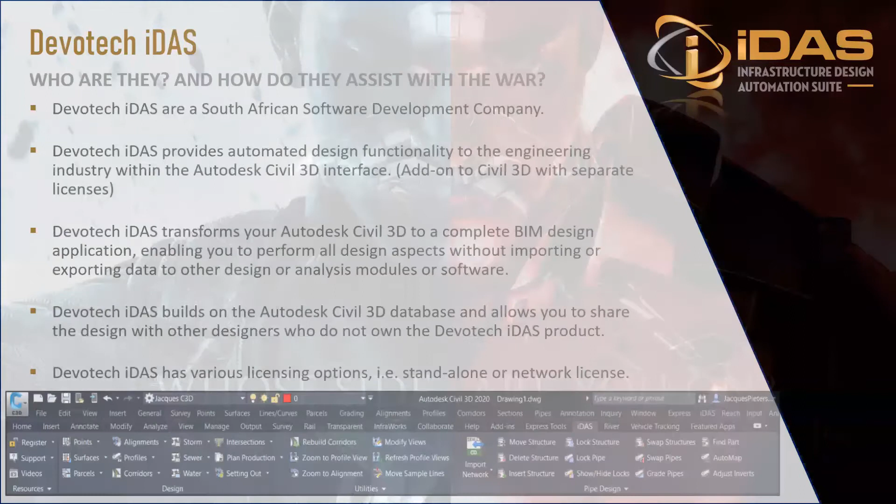So moving on, for those who don't know what Devotech really is, I'll quickly explain. Who is Devotech iDAS, and how are they going to assist us in this little Civil War reenactment I have prepared? Devotech is a South African software development company. They provide automated design functionalities to engineers in the industry within Autodesk Civil 3D interface. In small brackets, it's actually an add-on to Civil 3D with its own separate licenses. Devotech iDAS transforms your Autodesk Civil 3D into a complete BIM design application, and it enables you to perform all design aspects without importing or exporting to other design or analysis modules or software. So everything is basically done inside Civil 3D, there's no more import or export of data at all. They are built upon Autodesk Civil 3D, so Devotech can't actually work without Civil 3D because it's built in, and that's the key function.

There are various license options that we provide, for standalone and network licenses. I also added at the bottom a small tip of how it looks like in Civil 3D. As you can see at the bottom, there's this little iDAS icon, which is the actual add-on with its amazing functionalities.

For the main part, the Civil War, we're going to discuss today how road designs are designed and modeled throughout. So a quick overview: the first segment will show how Civil 3D alone, the traditional way, constructs roads and intersections currently. Then we'll move on to how Civil 3D and Devotech iDAS does the automated way of designing roads and intersections. Finally, we'll compare the results and statistics of who is actually winning this battle, because this is a two-part system, we're going to go into depth seeing who's the winner at the end.

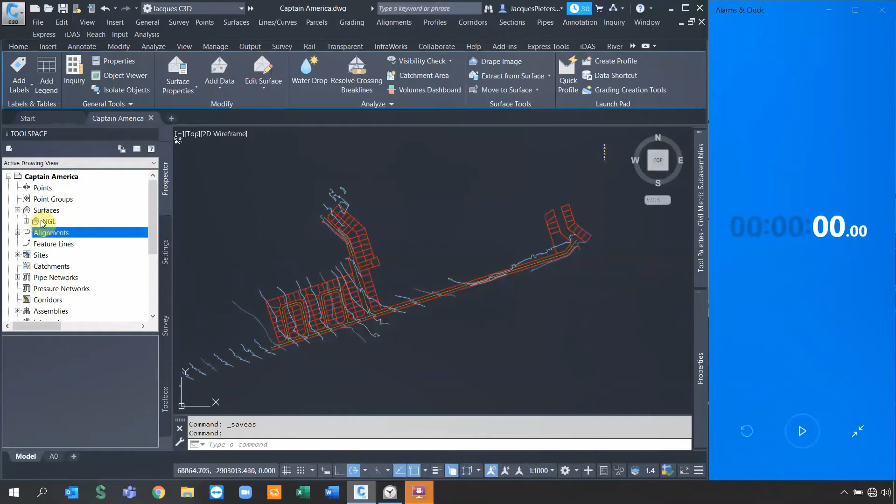If I jump to Civil 3D, we can start off. Just to indicate one more time, there's an already existing surface called NGL, as well as outlines for the polyline. We're going to design these 2 roads, and there are additional 4 roads which you can also go and design a bit later on.

Now, like I mentioned, the assemblies have already been created—for the roads, as well as for the intersection design and the bowmouth design. So all of these are already set up and ready to go. My main objective is to design these 2 roads and the intersection.

What we're going to do is I'm going to time myself and quickly do all of these steps. I'm not going to mention each and every step I'm doing, but I'll call this Captain America because this is his drawing file. I'm going to go into a bit of technical detail right now, but you'll find the benefit as soon as I go. So without delay, let's start this thing.

Quickly, if I want to create any type of alignment from an existing object, I can say alignment from an object. If I go select, it's going to ask me which direction I want, and it indicates the direction. I can give this a proper name, specify the site, as well as defining the label set. I'm going to change this to major above center line.

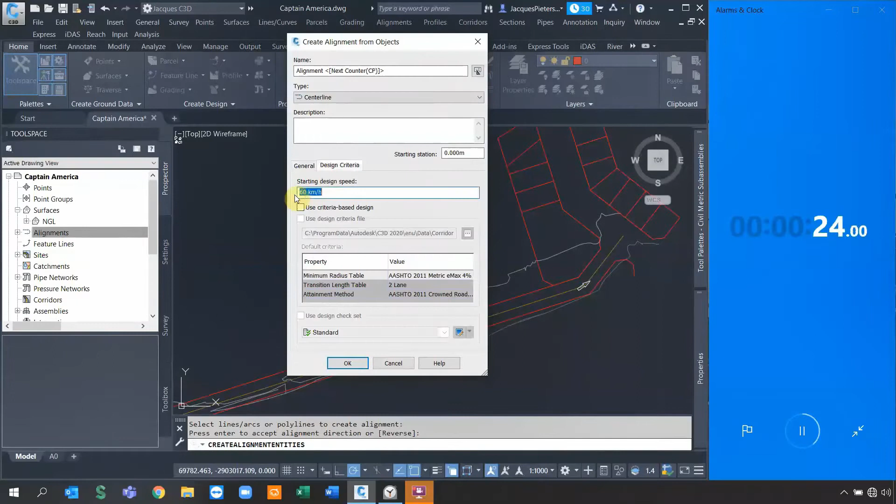The design criteria, because all of our roads are according to standard, needs to be designed according to SANRAL—I'm going to use that as an example. And I'm going to say use design check sets. So I simply say OK, and transform the polyline to an actual alignment.

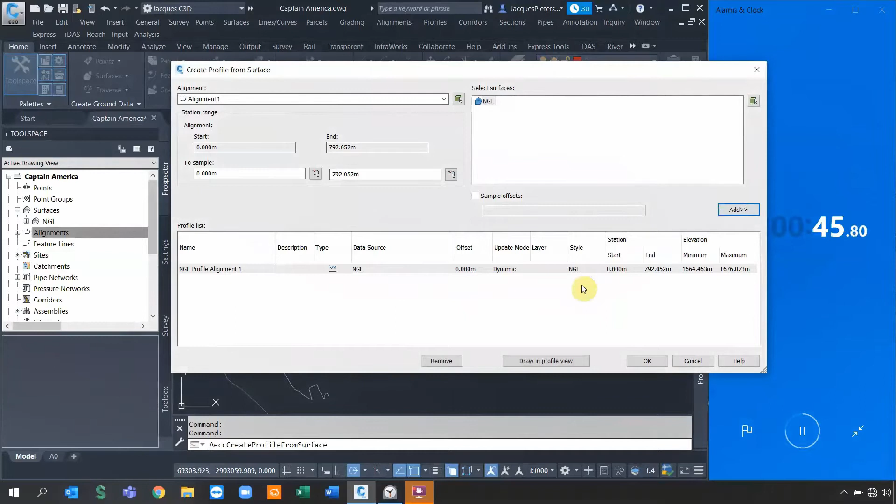Now the critical next part of the design is the profile design. If I go to create profile from surface and add it to my system, I can simply say draw in profile view. For those who don't know, profile is a fancy word for vertical alignment in Civil 3D.

So I need to set up my bands and my station range to set up my long section, or in this case, as we call it, a profile view. I set up the bands and say create profile view. As soon as I do that, I can place the profile view somewhere here in the space. And now I'm ready to do the next design.

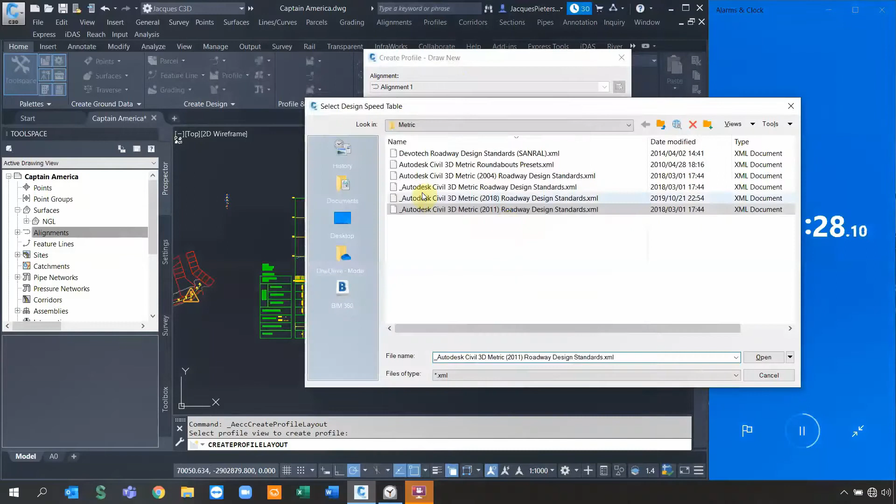The next design is the profile design itself. As a civil engineer, I just set up one setting—I don't want labels on these things—as well as its design criteria, which is normally our K values that we need to specify in a long section. So I can say use design check, and there we go.

So I can just quickly model up and design this road. Just for time-consuming purposes, I'm not going to design it 100%, but I'm going to design it very closely to accurate. Let's say, for example, I'm going to place it somewhere over here and just snap to the end.

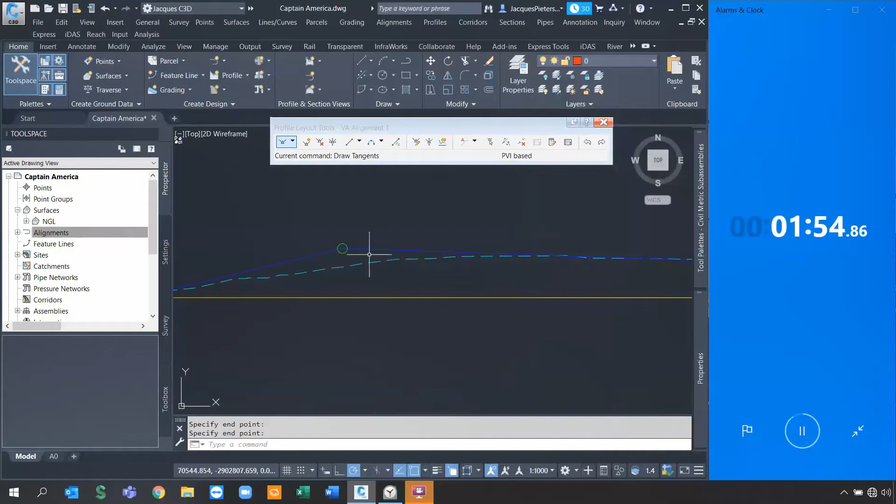There we go. Then what you can do is add free vertical curves. I like to use this free vertical parabolic PVI base because it allows you to give a few settings. We'll specify the radius as 100, and there we go. As soon as I do that, that's now sufficient enough. You can still add more PVIs if you want to, but like I said, this is a time constraint—I'm trying to get as much as possibly done to design 2 roads and the intersection.

As soon as I do that—very critical—I need to design my super elevation because I do have bends around it. So I can go and specify, create super elevation now, and specify what type of system.

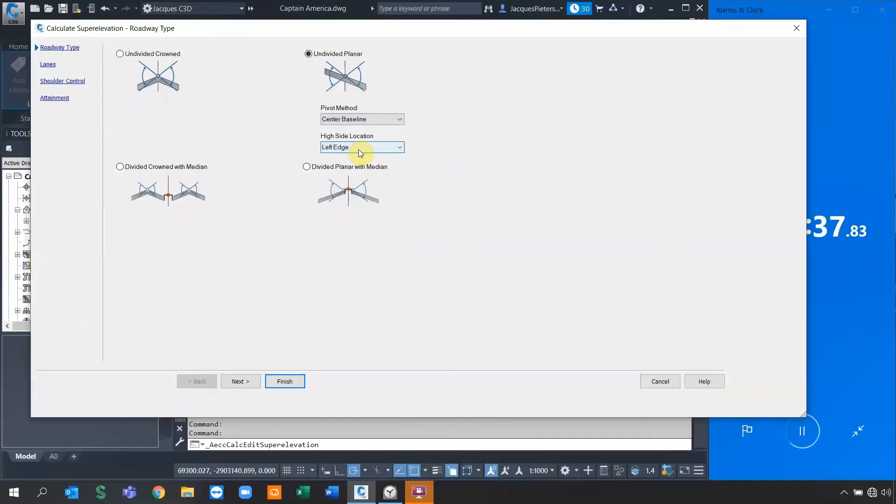Now I want an undivided planar, as well as which side is my high side. Left edge will be fine. And then I can go and say next and specify the normal lane width. So in this case, I'm going to specify the width as 3.7.

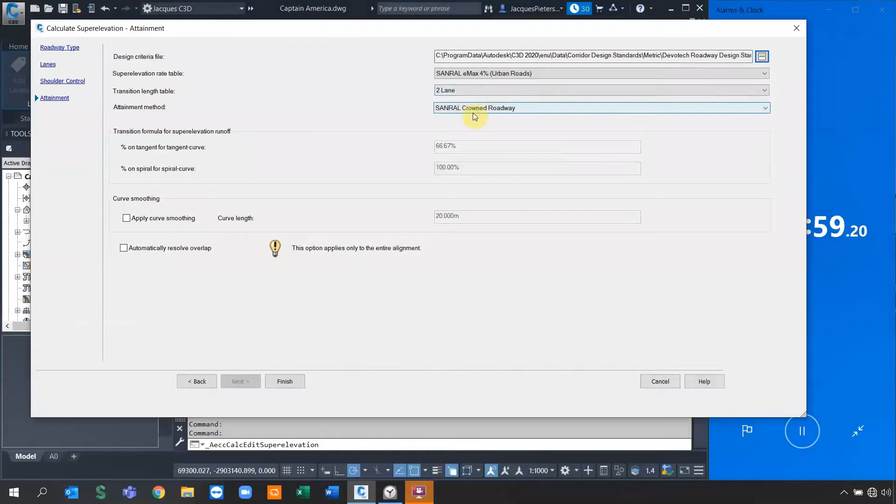The outside edge shoulders, I can go and specify, as well as we have design criteria for the super elevation design as well. I'm just confirming I'm using Devotech's SANRAL standard. So as soon as I do that, I can say automatically resolve overlaps if there's overlaps in my super elevation. And there, ladies and gentlemen, it's done.

So we've designed the alignment, the profile, and the super elevation. Now the next step is I need to basically go and combine everything else. You can also see in the long section, it actually adds that super elevation details. So the critical stage now is I need to go and put this together.

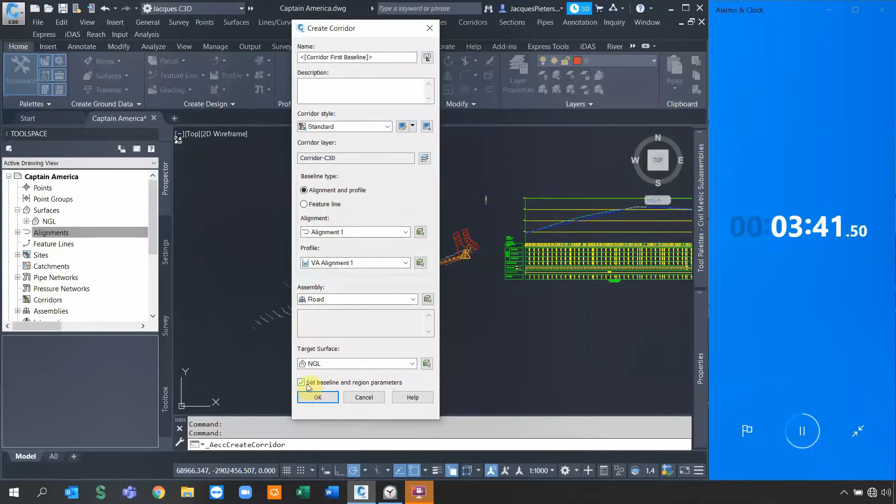So that's what we call create a corridor. If I go to my tab, corridor, I can go and create a specific corridor and specify the profile design. My assembly, I'm going to use as road, and my target surface needs to be NGL. Then I can say set baseline and region parameters, and there we go.

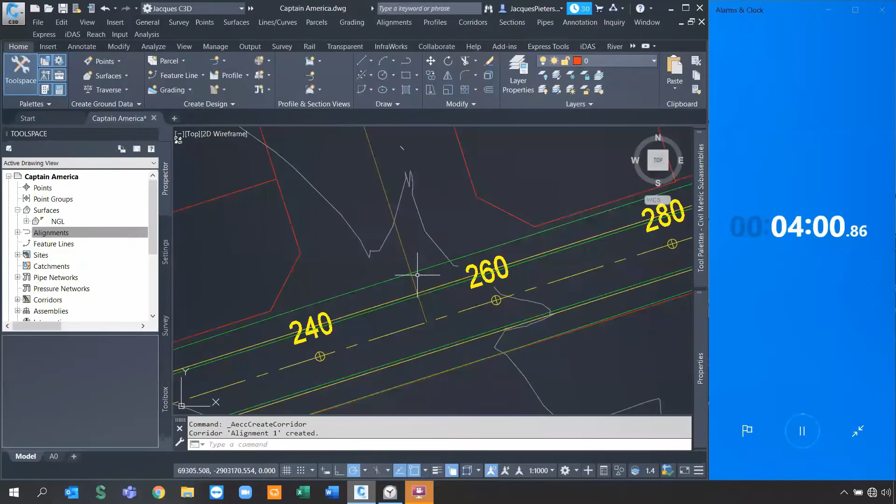So that's creating just one road on its own, but there are some few elements missing inside of my long section. As you can see, the values and the levels are not correct because I need to extract that data. The data I acquire is called ETWs. It stands for edge of travel way. It will pick up the levels on each side of the road.

Now, in Civil 3D, the old-fashioned way, we need to do this by hand. So I am literally going to say create profile from a corridor, and I'm going to call this road 1 ETW to the left. The style is to the left. And I need to do exactly the same thing for the right-hand side.

So as soon as I do that, I can simply go and create it. And I can say road 1 ETW to the right. And I can just change the style to ETW to the right and simply say OK.

So as soon as I do that, it creates the two additional profiles. And as you can see in my long section, they have appeared.

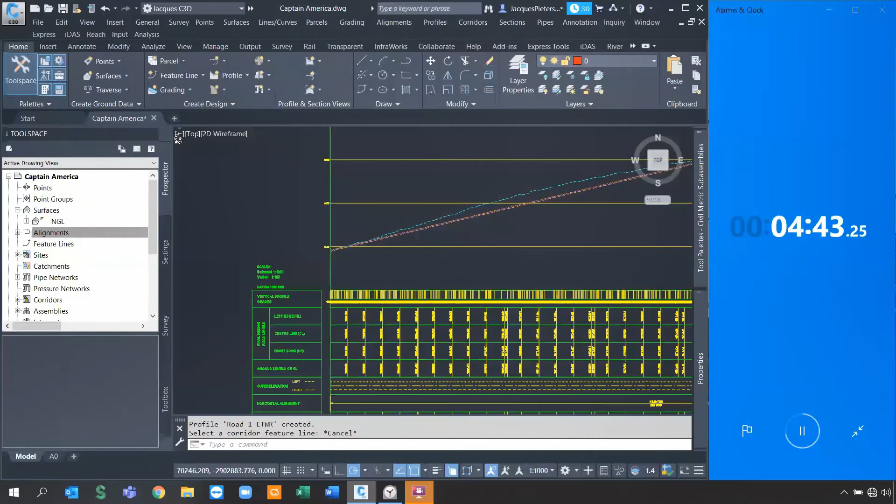Now, one thing I need to set up manually in the old-fashioned way is I need to go to my profile view settings so I can correspond the correct data inside of my bands, or in our case, on our vertical long section. So this is a bit of a tedious process that we need to do manually.

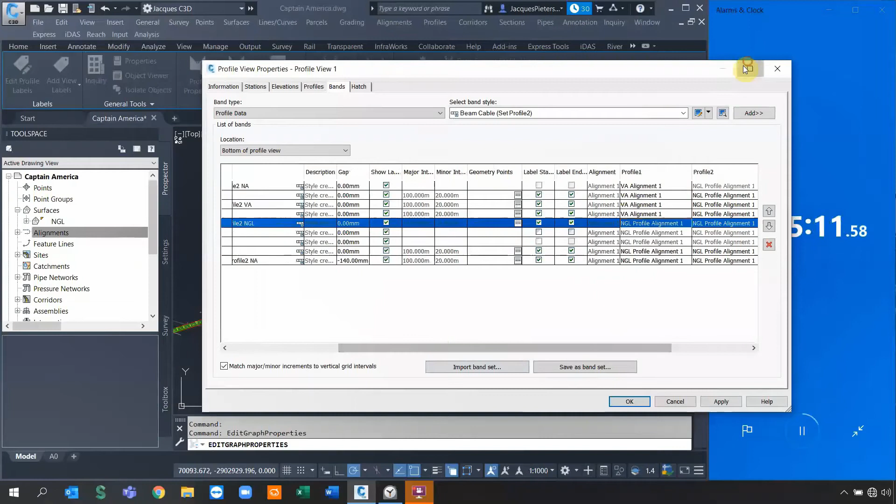So what Devotech iDAS actually have done, they've made it very nice with their styles. And if you're even a beginner, it's very easy to follow. So in the styles, in the beginning styles, it tells you which profile goes where. So I'm just going to change quickly these things.

That needs to be VA. This needs to be road ETW to the left. VA, ETW to the right. Yet again, VA. Oh, sorry, that needs to be NGL. Yes, that's correct. And I can simply say apply and OK.

So there we have created all of the correct data inside of the long section. And now it corresponds to my perfect design. Then something to mention, what we do require a bit later on is, as you can see, the levels and the super elevation.

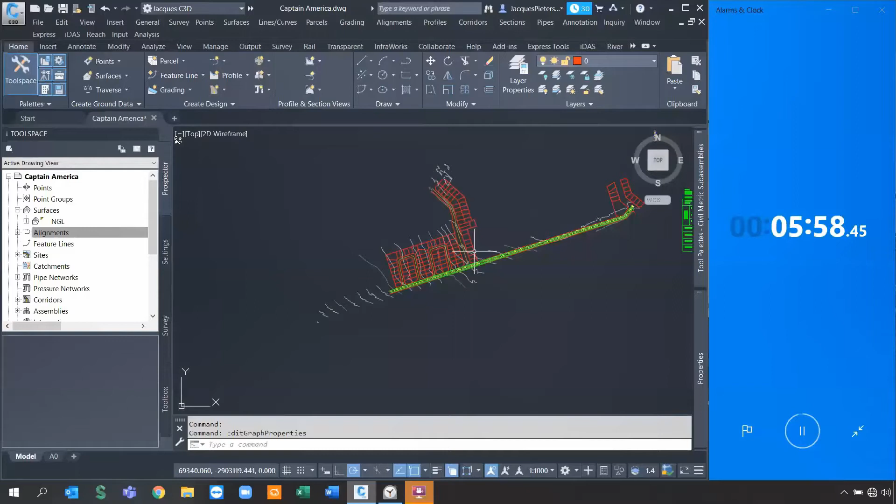So another way of displaying these levels is by creating a topo surface for my road. Now, the old-fashioned way we need to do this, we need to simply go select the corridor. And inside of the corridor, I need to go to my corridor properties and manually add these surfaces.

So if I go say add the surfaces and I rename it, I'm going to call this, let's say, road 1 top. So it picks up the specific code. I can give this thing a specific style as well. So let's make it contours colored 0.2 and 0.4 increments.

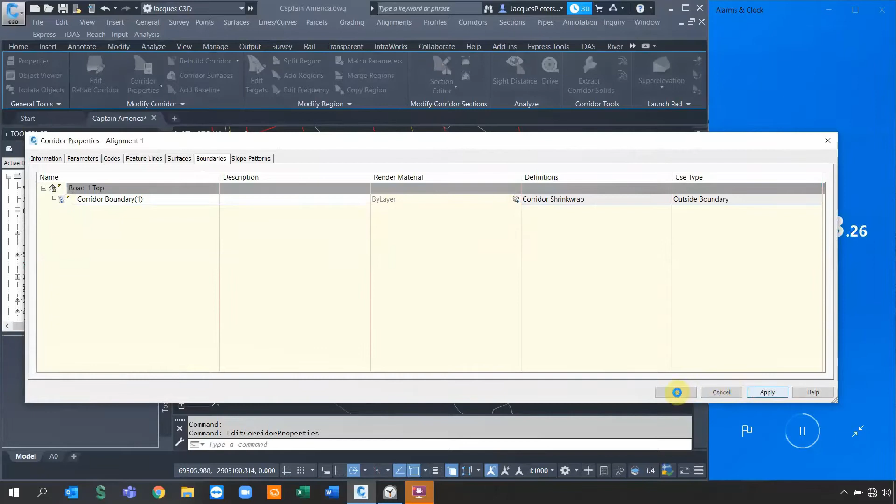And I need to go and add to specify the code and specify top links. Then for the boundaries, so that the surface does not extend outside of my boundary, I set up that detail and say apply and OK. As soon as I do that, it actually builds the entire road.

Now, in this stage, I am happy with it, but now I need to do exactly the same thing for road 2. So you can see where this comes in a bit tedious. So let's just quickly create from objects again, because this is a challenge, ladies and gentlemen. Just bear with me. We are going to do this, but you'll find the benefits afterwards. So if I just go quickly set up the SANRAL again and say, OK.

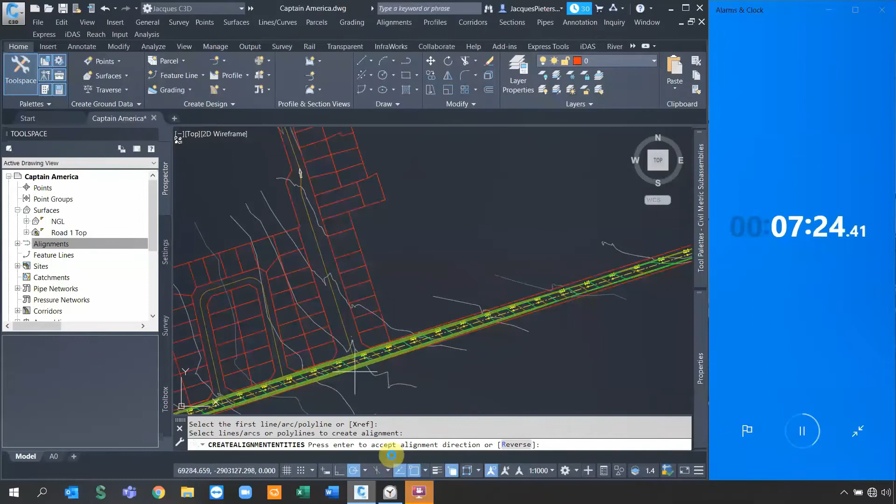Oh, my fudge. You might notice this happening in your industry. When under time and compression, you make little mistakes. So I selected the wrong option. Let me do that again and reverse this, say from an object.

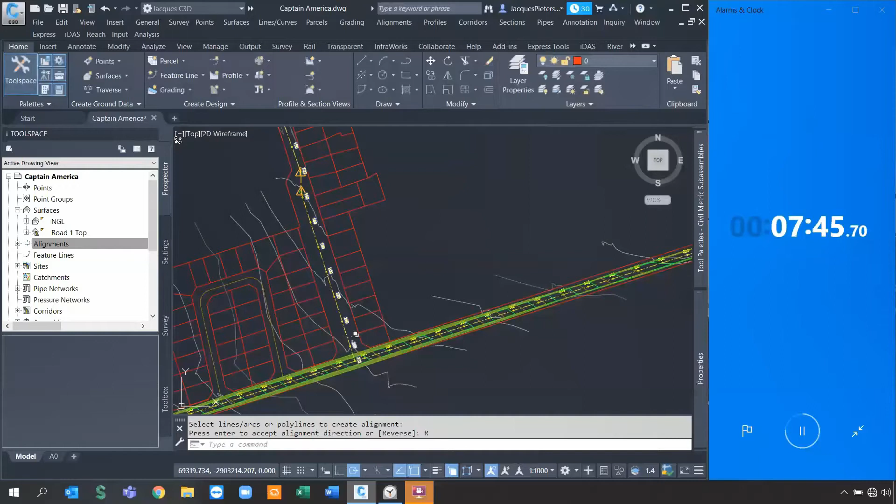This does happen sometimes, and this is why I want to put emphasis on it when using the other version, which I was going to quickly discuss with Civil 3D and Devotech iDAS. So just quickly do this again: Devotech roadway design standards, use a design check, and simply say OK.

As soon as I do that, we've got this alignment again, and I need to go design the rest of the road. So if I go to profile, create surface profile, and specify road, there's a road 2 and a road 2-1. A mistake like this can cause even more confusion.

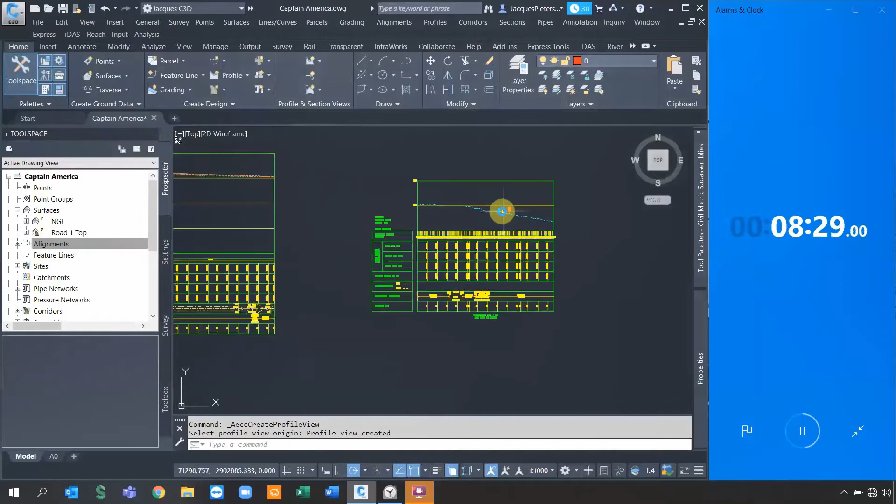So that's why you should always be cautious when selecting and creating your elements. But there's a big benefit - there are much easier ways to do this and reduce errors. I'm going to run through the systems again and create the profile view, placing it somewhere close. There we go. Then the second mistake, selecting the wrong icon, profile creation tools, and now I'm going to do the design.

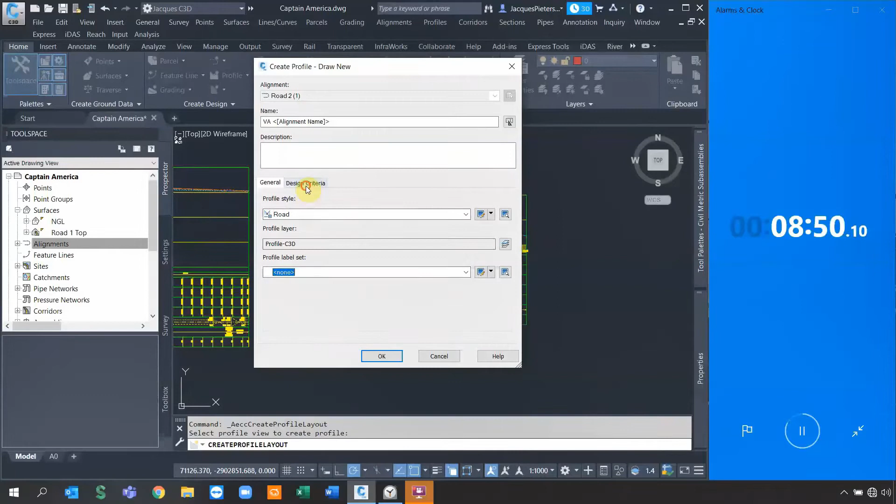Like I mentioned, I did this deliberately because sometimes it happens in our industry. Clients want stuff faster, and as engineers we're pressured for time, so making mistakes is a critical issue. I'll show you later how Devotech iDAS assists in reducing these errors. So I'm just going to quickly design this road.

I'm going to keep it very simple. Let's place it very close to the NGL, somewhere over there. Or let's move it up a little bit. There we go, and I can go adjust it. I'm going to snap to the end, and Bob's your uncle. There we go.

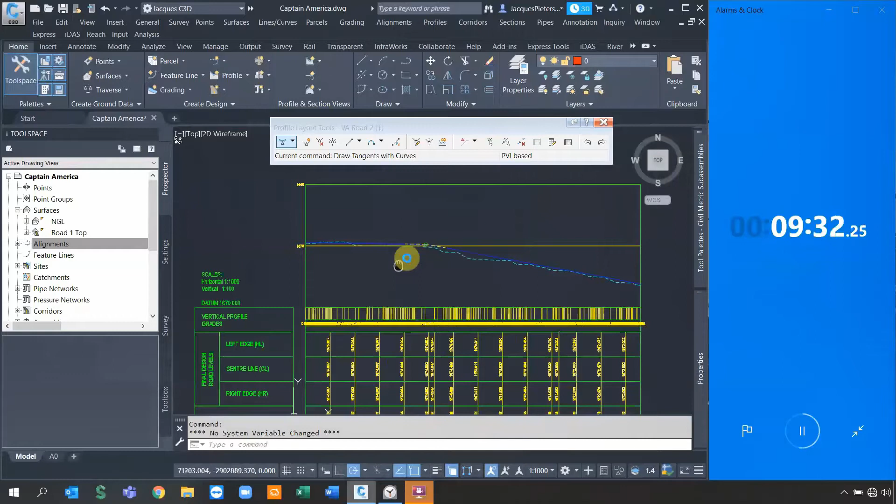So I just want to confirm - that looks a little bit too steep. Let's just move it down a little bit. There we go, that looks much better.

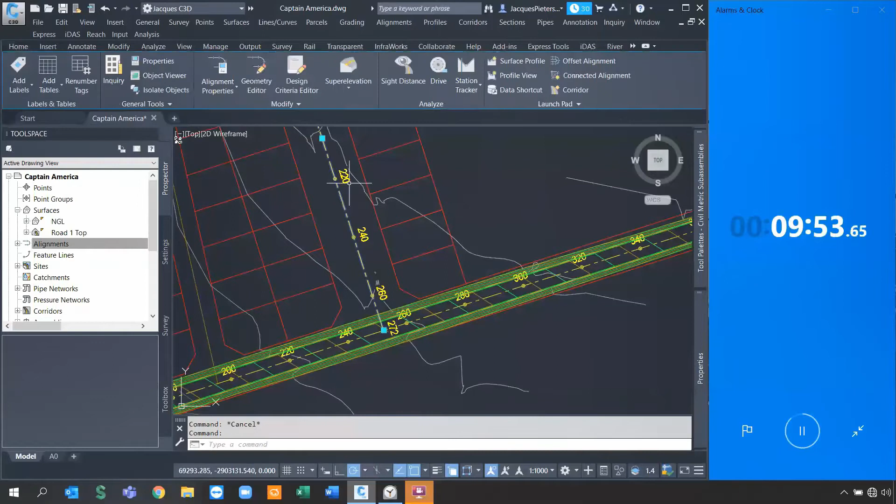Wonderful, so I've designed the alignment and the profile, and now I need to define the super elevation design for this. To do the super elevation design, you simply select the alignment, go to super elevation design, and say calculate and edit super elevation. As soon as I do that, I'm going to go undivided planar again, and you actually have more capabilities.

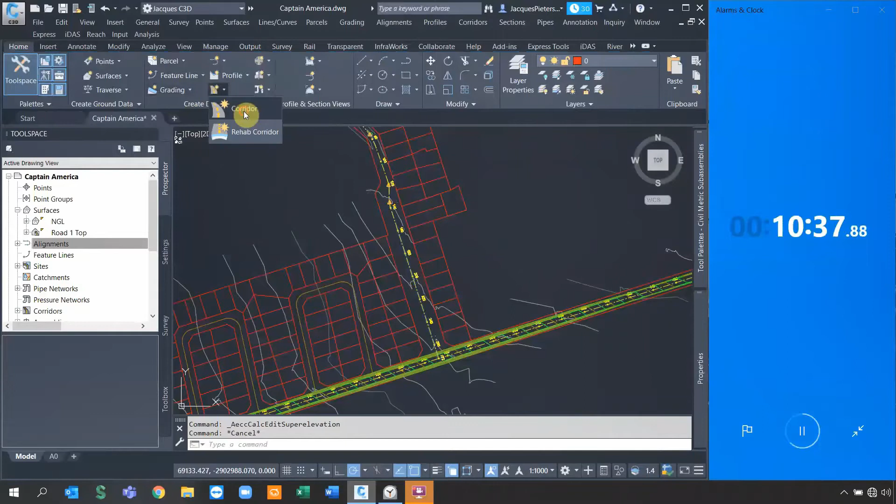As soon as we do that, it designs the entire super elevation, and now I can move on to the next stage. I can go and create the corridor - corridor selection, there we go. It actually creates a road 2.

Let's specify the VA as well as the assembly, still road, and the target surface is NGL. I'm not going to set the baseline region parameters this time, so I simply say OK. And Bob's your uncle, there we go.

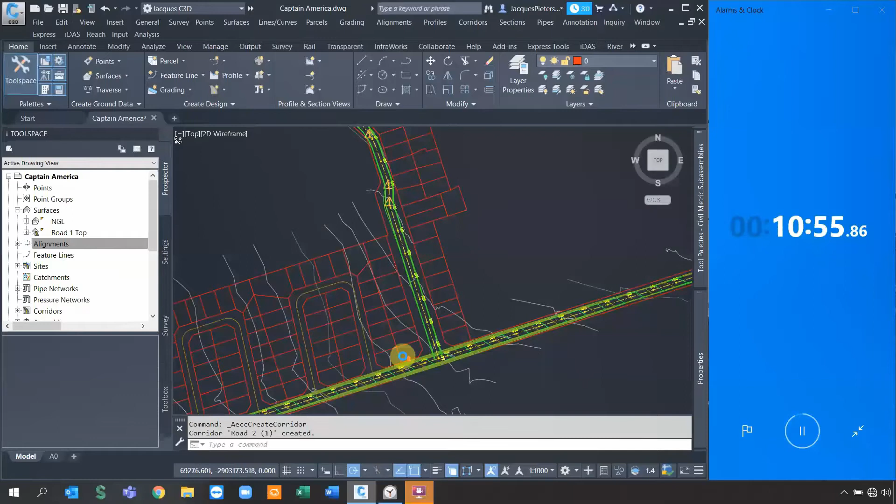So 2 roads took at least about 10.55 minutes to do, and I still need to fix up this road segment inside of the long section, so it's still not 100% complete. Let's quickly do this together for the last time, ladies and gentlemen.

I'm going to add the ETWs because this is all about performance and accuracy. I can give this a name - I'll call this road 2 ETW left. I can set up the rest - this is actually supposed to be left, ETW to the left. There we go, and simply say OK.

Then I need to do exactly the same thing for the right hand side quickly. Let's specify ETW to the right, give it a naming convention, road 2 ETW to the right, and simply say OK.

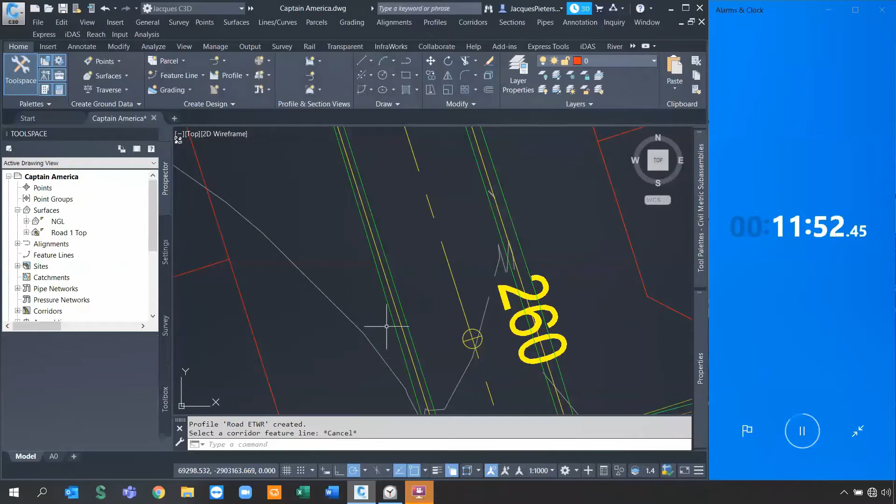As soon as I do that, it creates the 2 profiles. If I zoom into the actual one, you can see the super elevation taking effect on the profile. Something I need to mention is in Civil 3D, these ETWs are static, so if modifications are made into this file, they won't update. If I change any type of my profile design, these will not update, so that's something to note.

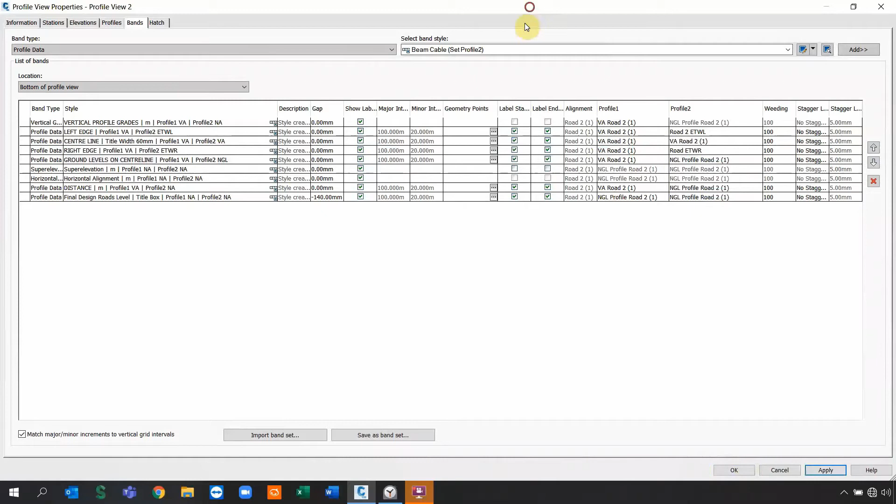But this is in the past. There's a better way of doing it using some awesome tools inside of Civil Tech iDAS. So I'm just going to finish up this real quick. Change the last one to NGL, and apply. Let's just check - yeah, that's perfect.

It's now having the right data, so I can simply say OK. One critical element I still need to add to the last road is that topographic surface for the top road, because if I'm designing the intersection, I'm going to need that surface. So if I go to corridor properties, for the surfaces, I can say the last one for this for road 2, top. I type in top, and add the code quickly, say top links and boundaries, and add the corridor extent to outer boundary. I simply say apply and OK, and there we go.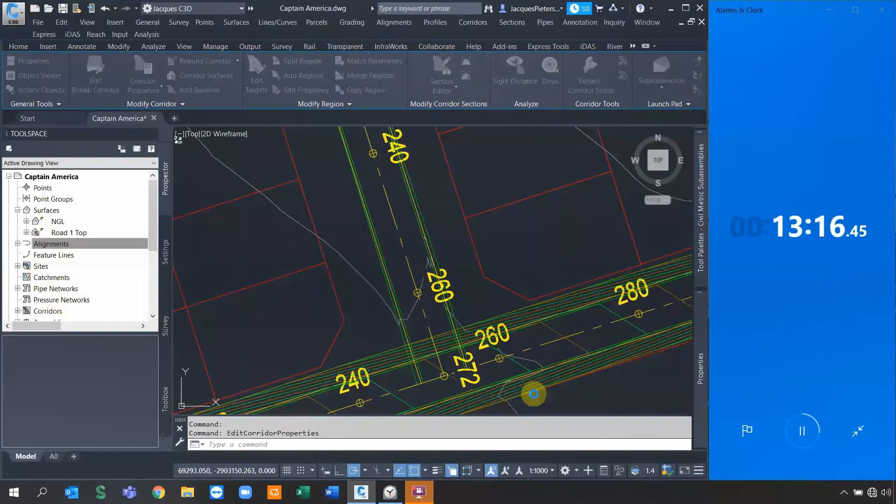Oops, I forgot to actually go and change this style, so it's now set to triangles. Now there's a faster way of actually changing a style - instead of going to the properties tab, I can simply switch this out very quickly. Let's just change this to 0.2, and that looks sufficient.

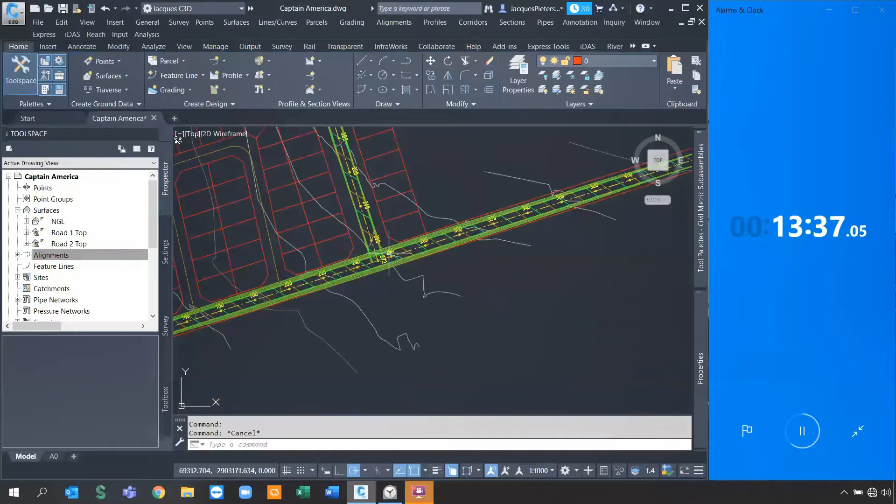So technically it took me 13 minutes in total to design 2 roads successfully. Now what I want to do next is start designing the actual intersection between these 2 main roads, and let's see how far we get.

Very critical - what I want to do is maybe just switch off these 2 surfaces, because they might cause some errors in the graphic display when I'm doing the actual bow mouth designs. So I'm just switching those 2 off, and now I can go and define this.

Now the first step I need to do is draw out my bow mouths manually. I'm going to create a new alignment and call this bow mouth to the left, because I need to tie in the one road to the other, and I'll call the type a curb return. For those who don't know, a curb return is a fancy word for bow mouth, and as well as the curb return, I can go and specify the style - no labels, and we're not going to do any design criteria.

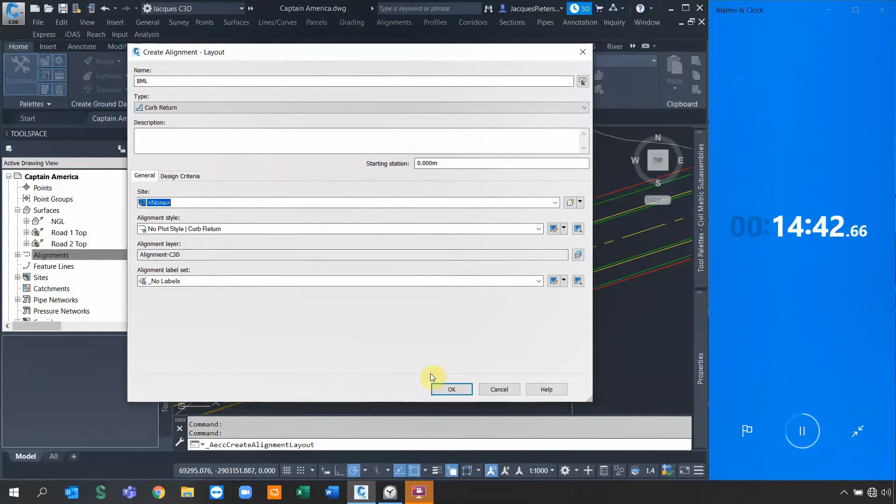Now this is a bit tedious - you need to do this for all of your intersection design when you do this manually. But never fear, Jacques is near, and Civil Tech iDAS is around the corner, and they will show you the way - we'll look into that a bit later.

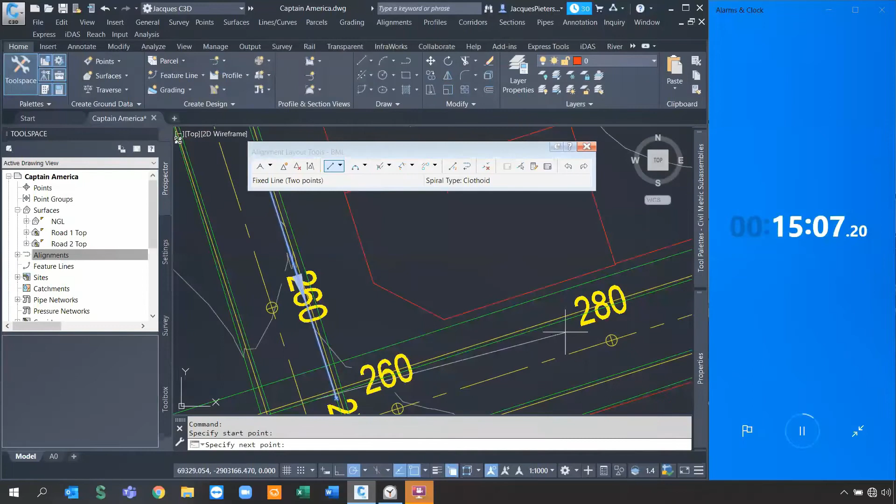So I need to go snap to that ETW just to connect to them, because they need to be exactly on that same spot, since that's where it's going to pick up the levels. As you can see, I can quickly go and snap to the points, ETWs. The reason we need to do this is because our bow mouths are controlled by radiuses - this is a nice function for defining specific radiuses.

So if I go and select the alignment and select the second choice and specify less than 180, because this is an intersection design and not an off-ramp design, I need to specify the radius for my bow mouth depending on what type of scenario you've got. We've got urban development in this stage, so I'm going to say 10 meter radius.

Now I need to do this exactly the same for the other side. So if I go and say alignment creation tools, let's just quickly do this alignment and say bow mouth to the right. And yet again, this one actually remembers the settings, which is a bit of a time saver. Then we need to manually go and connect these elements.

So I'm just going to select this option and just quickly snap. As you can see, yet again, I made another mistake, the snapping problem. So this can also occur.

It reduces the amount of work you're doing in your company, but like I said, there are many ways we can actually do these things faster. It's even scary at some point, but we will look into that a bit later.

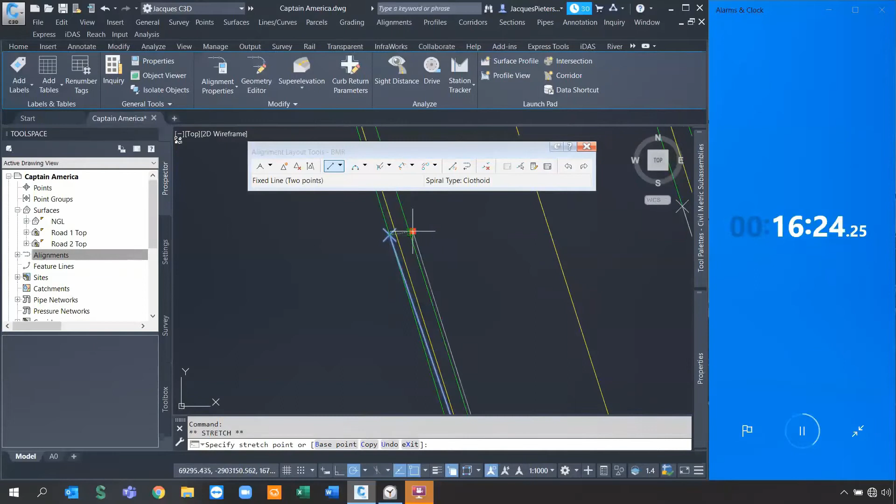As soon as I move this to the right position, so far I've made 3 mistakes in this entire webinar. Like I said, this happens in real life. Nothing is perfect, but we always try to achieve something spectacular.

So I'm going to go to alignment quickly again and specify this radius as 10 meters. So there we go, those 2 are now nicely defined.

Now the critical element is I need to link these 2 roads in profile view. So what I need to do is project road 1's top of surface so I can actually tie into that exact road.

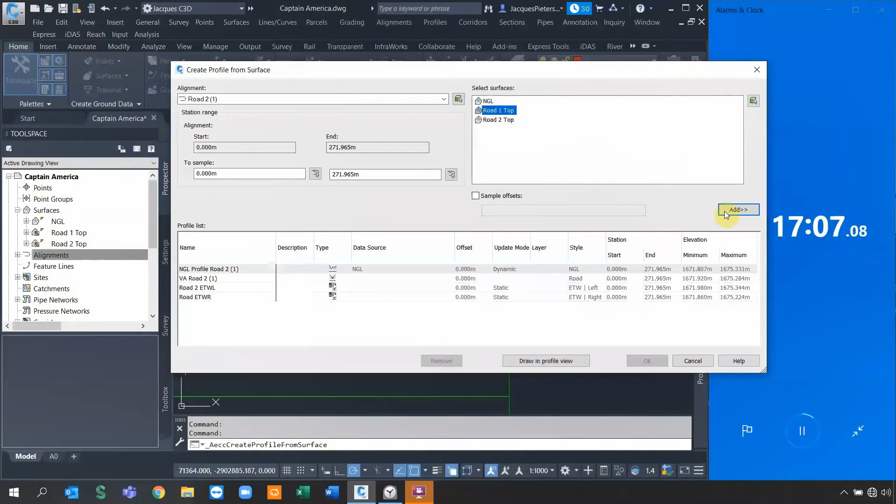Road 1 is my main road, and the secondary, or road 2 in this case, is my secondary road design. So if I want to add an additional surface, I can say quickly draw in profile view, just say okay, and it adds that surface.

As soon as I do that, you see that's the representation of road 1. Now what I need to do is make sure I tie into this road directly.

Let me just make sure I've got the correct snaps on. So let's go to snaps, and let's switch off nearest node. Midpoint will actually work, there we go. And I can snap to that exact point.

So what I'm basically doing is tying the 2 roads to one another, so we don't have one road higher than the other. That's the main critical stage.

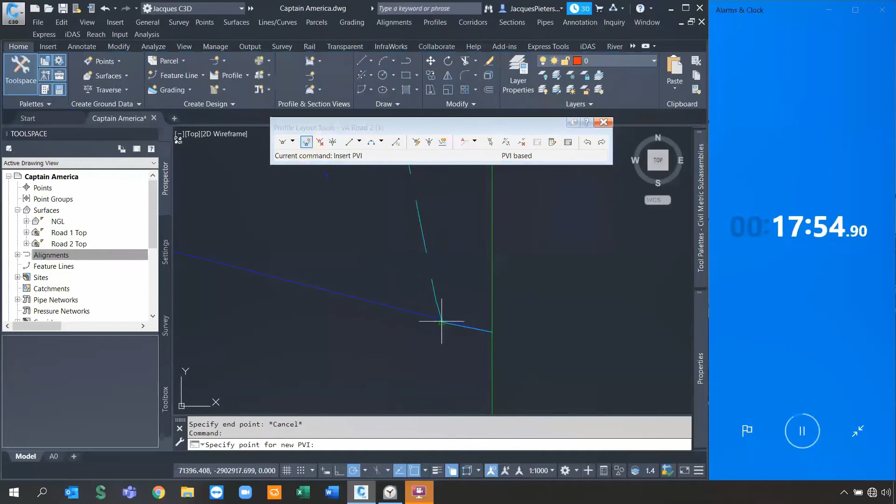And then I want to just follow this line because it needs to tie in directly all the way to this ETW to the side. So I'm just going to insert the new PVI, and I'm going to add it to the new PVI.

Yet again, the snaps is not correctly setup, so let me just quickly fix this and switch on to the right snap. Let's go quickly to snaps, and let's say endpoint, and I'm going to switch off the midpoint.

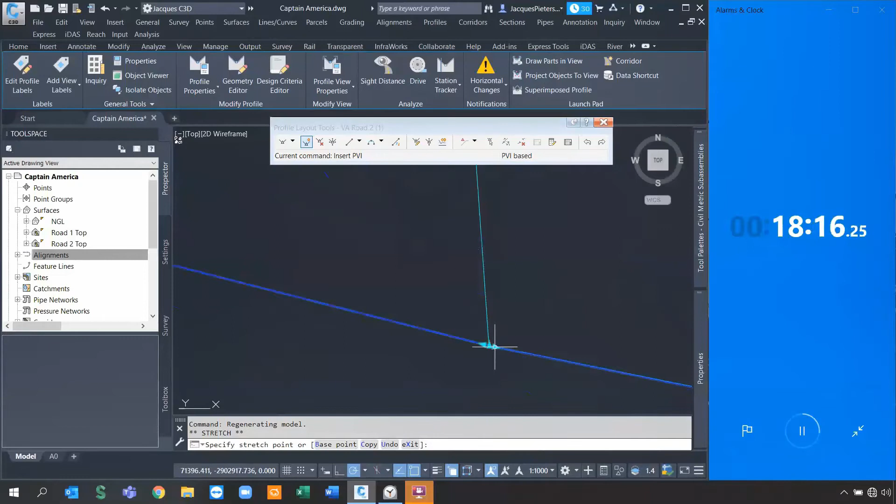And there we go. So it's always the little stuff that makes the biggest difference in life, and those are one of them. So as soon as I do that, I actually changed it.

And as you might have noticed, if I rebuild the corridor because it's outdated, it needs to update those levels. Now, like I mentioned, the ETW does not update in the old Civil 3D. As you can see, it actually still left behind.

So you need to do this manually again, over and over, which is very time consuming, especially if you've got a lot of projects. So you can think how much time it will actually save you when I show you the automated form.

So after I set up those elements, I can move on to actually defining these bellmouth designs. One thing I need to do is also design the bellmouth profile, so I connect road 1 to road 2.

I'm going to select road 1 top surface, road 2 top surface, and define a style as to be top surface. So I can see these levels in profile view because the bellmouth needs to go around itself and actually connect so that the water can drainage out of my intersection.

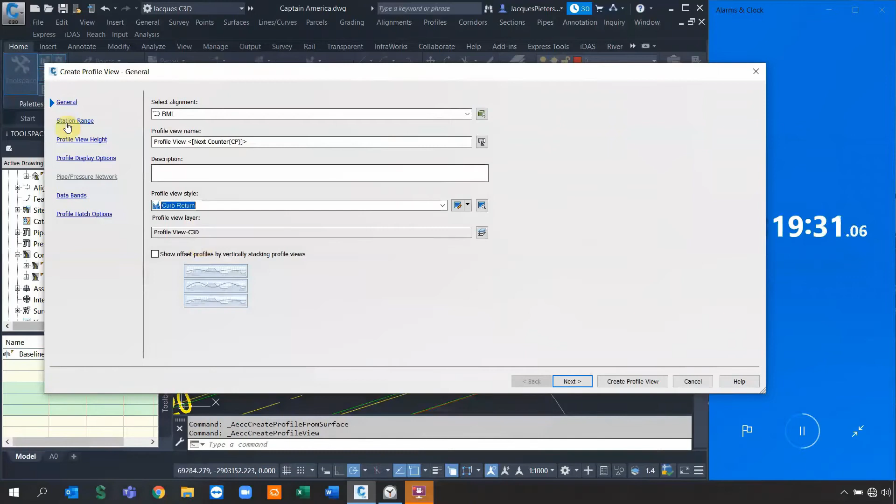Now, yet again, I need to go set up the create profile views. And I can say curb return and say next, so it has its own style. I'm going to just quickly run through all of these settings quickly, just want to check, yeah that's okay.

We don't have specific bands because normally these profile views you don't show to clients, this is just for you as an engineer. So I can simply say next. After this, there's no bands, and I don't have any hatching.

As soon as I do that, I'm just going to quickly do one, ladies and gentlemen. I know you guys are getting the feel for this. So what I'm going to do is link those two quickly together, and then we can build half of the intersection.

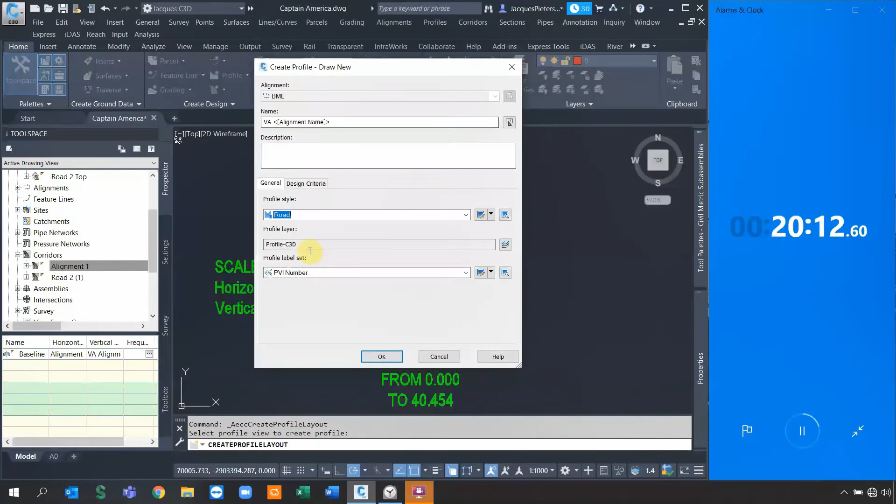So as soon as I do that, I can simply go to profile creation tools again, and I'm going to quickly link these two levels because if you remember, in the intersection design, the water needs to run out of the intersection around the bellmouth. It saves a lot of time for your contractors and less frustration to do these bellmouths when building in real life.

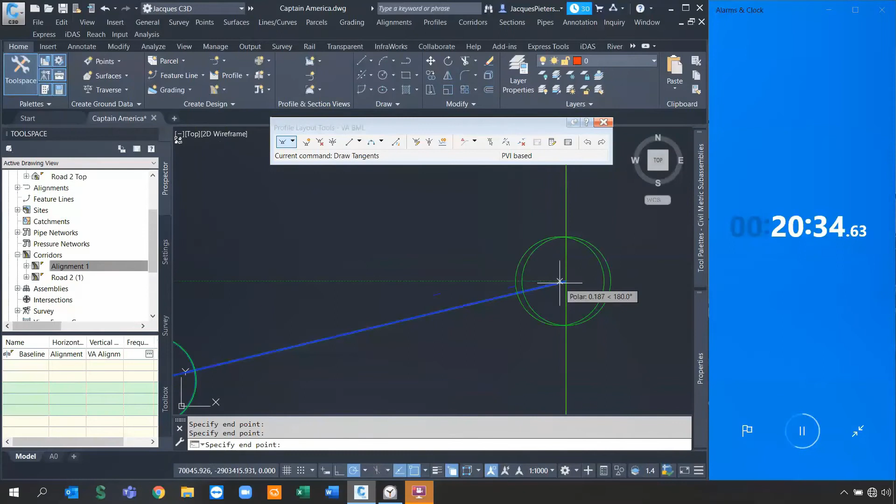I'm talking from experience. I've done this before, and there are some designs where I had to go and literally tweak some of the elements, and it was very frustrating. But with this workflow, it works very nicely.

So as soon as I define that profile design, I'm already set up to go and do this actual design. Now, one thing is inside of the intersection, one part of road 1 is still having a curb and daylight function. So what I need to do is literally split this segment, because if you remember, half of the intersection is actually just road, not paving.

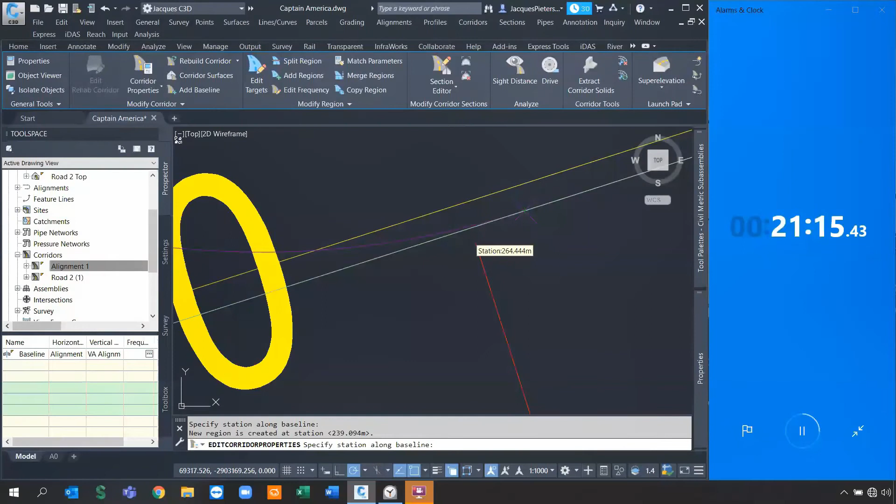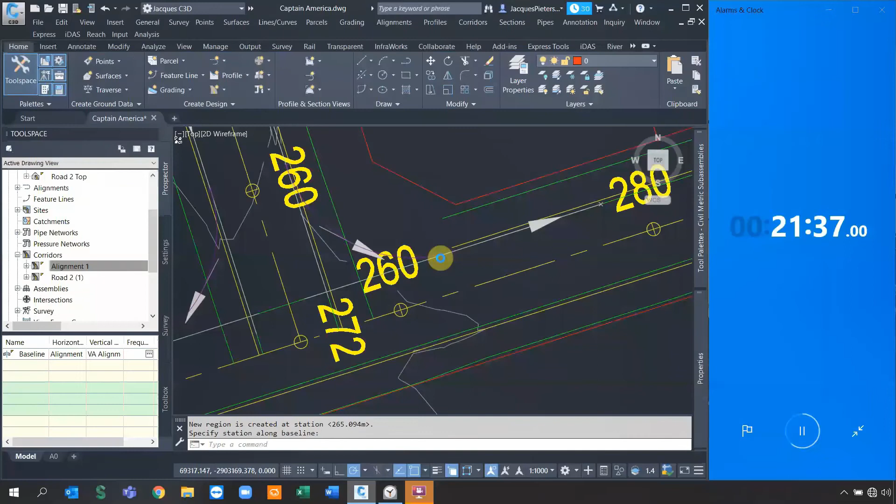So we just split the corridor and put in a new segment. I snap to these points where the end of curve for the bellmouths are, and the one for the beginning. Now this one did not snap, so let me just split the region again and specify that position. As soon as I do that, it has this part and I can swap out that assembly, saying road intersection on the left, apply and okay. It swaps out that part and I'm only left now with this little gap inside, which is exactly what I want.

Now there's a little tactic about this, because before we set in the bellmouths, I need to go and specify targets. Just to make my life easier, I'm not going to go too much in depth, but I need to create a feature line target directly. So I'm going to select the feature line target and target that EOP - they are very important, especially when I'm going to put up targets inside of my bellmouths. I'm just going to quickly run through this and you'll see where it comes in a bit later.

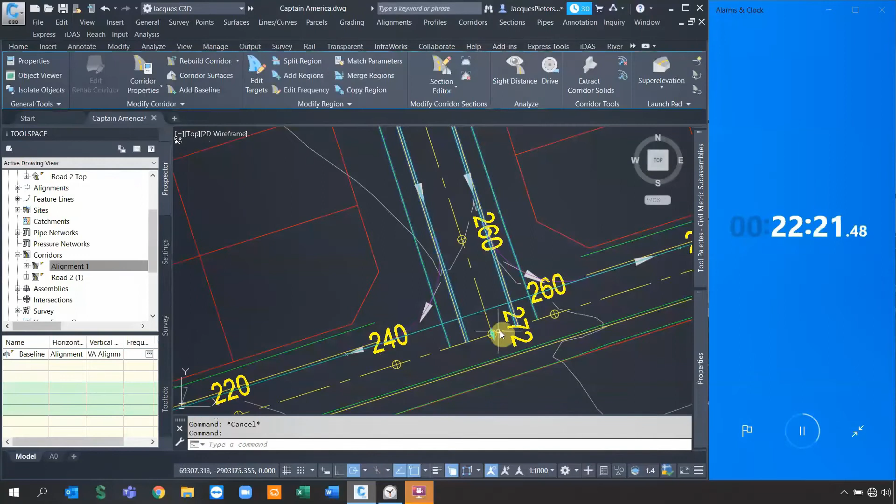Remember, we need to do all of this manually, ladies and gentlemen, and this is what takes the most time. But that's the benefit for today, because I want to show you the other way we can do it. Previously, I needed to go and actually define this corridor and push it back. And now we're all set up to start finally doing the bellmouth.

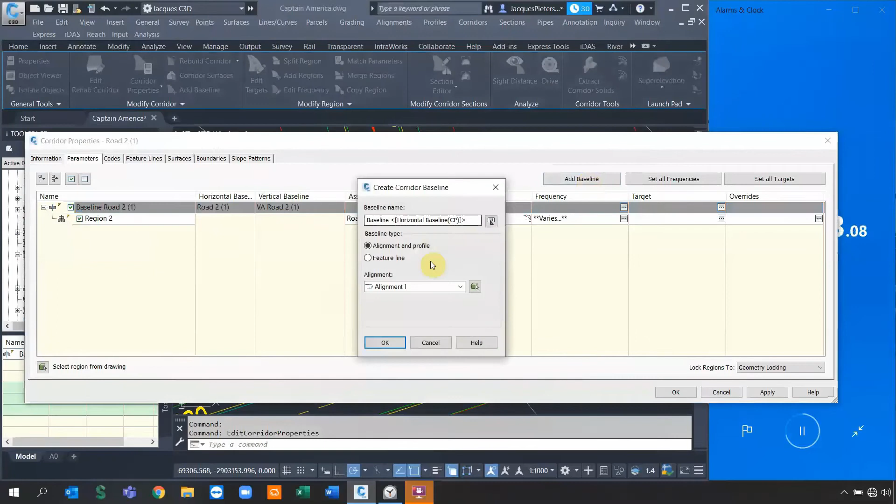So ladies and gentlemen, we're almost done. I'm just going to add one, because I get the feeling you guys understand what I'm trying to send out today. I'm going to quickly add this baseline, which is the bellmouth and its design. And there we go, profile.

I need to add a new region because that's an entire alignment and I only use a certain part of the bellmouth. So I can define the assembly, which is the bellmouth on the left, and simply say okay. As soon as I do that, it adds the region, and I can specify the starting station - somewhere over here, or the beginning - and the end for the other side.

So then the next thing, I need to go set up frequencies, because frequencies control the amount of smoothness in your surface. I'm going to change all of these to 1 because it's a bellmouth.

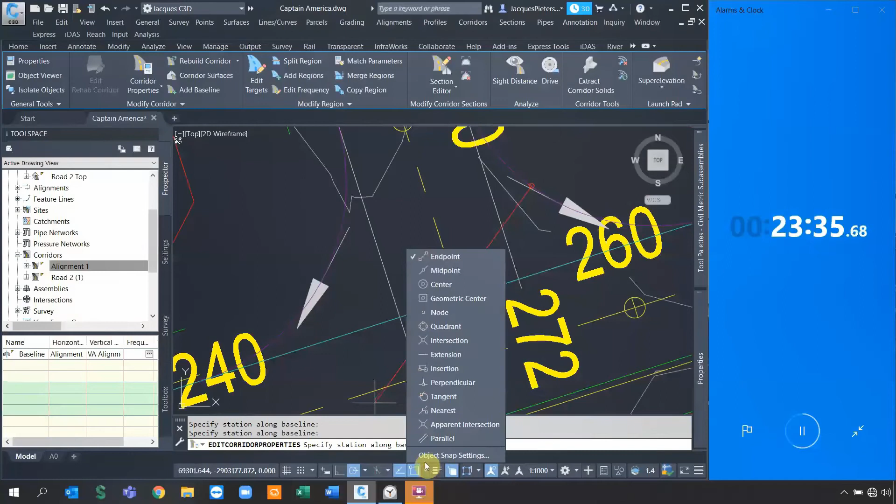So let's just go add a log offset target. You can even be more specific - you can add specific additional stations if you want even more accurate results, or additional frequencies. So I'm going to just do 1. I like to have this one in because it reduces the amount of errors inside of my intersection. I'm going to just add 1, just to show you that you can actually add more frequencies, for those who might not have known. So I can simply do that and say okay.

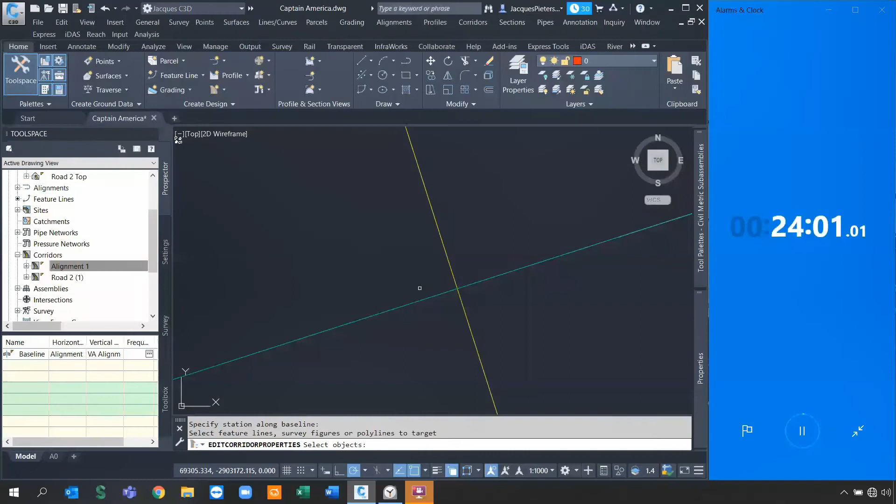And I can set up the target to surface, and the target surface for my daylight is going to be NGL. Now the width target, I need to select for that feature line, so it extends to that point. So I'm going to say auto corridor feature line, which I've generated, and so name the feature line.

Then what I need to do is set up a second target, which is actually the alignment. So the alignment is going to be for Road 2, and I can simply go and add that part and say okay.

And then finally, for the slope and elevation targets, I need to define this element. So I'm going to select auto corridor feature line. Yet again, the profile I also need to set as a target. Oops, wrong one, let's say Road 2.

There we go. I'm going to scroll down to the VA so it snaps to the center line levels. And ladies and gentlemen, we're finally done. I can simply say apply and okay.

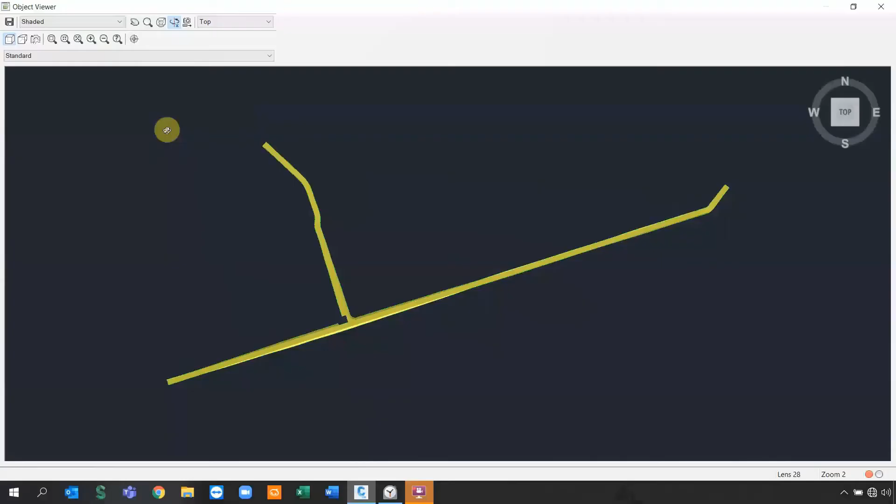And there's half of the intersection design completed. So if I select these 2 corridors, I'm not going to waste too much time creating the other one, we are pressured for time. But as you can see, it literally takes about 25 minutes to do the design. So you can add 5 more minutes to do the other half.

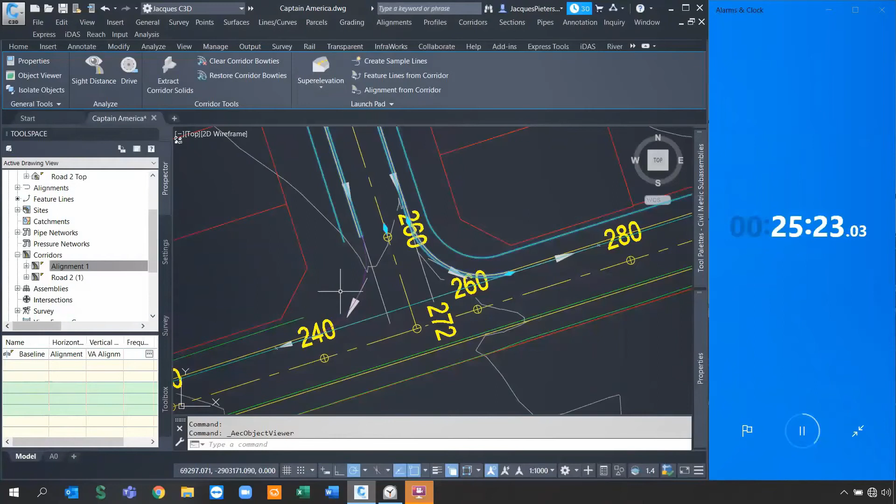But I'm feeling you guys get the idea. And like I mentioned, this is the old-fashioned way that we used to do these things inside of Civil 3D. So you might be wondering, is there a different method of doing this?

There is. So just want to show, if you do want to go create it, you can still go add a new baseline and specify the alignments. But I still need to design this profile view, which I did not do. So it will add at least 5 more minutes to do this other half of the intersection. I'm going to stop this, and our total was 25 minutes, 23.03 seconds.

So what does Iron Man have to say about this? Well, he says, well done, old man, I suppose.

Now it's his turn. Okay, ladies and gentlemen, I hope you're ready because this is going to be fast. So the new Civil 3D and Devotech iDAS automated way of designing roads and intersections. So you guys know the struggle, which I just did manually.

It was tedious, it was problematic. So I'm on the edge of my seat because I also want you guys to know, don't blink too fast because you might miss something. Here we go. So this time we're working on the same principles and the same amount of data.

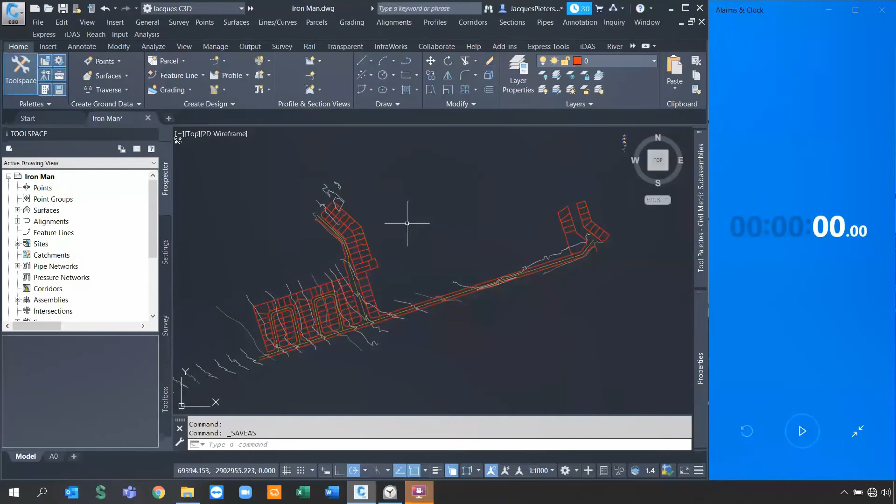So what we are currently doing, let me just start this thing. There you go. So what I want to do is we still got the surface, as well as the same profiles. I just gave this file a new name, it's just called Iron Man now. And we've got still the assemblies.

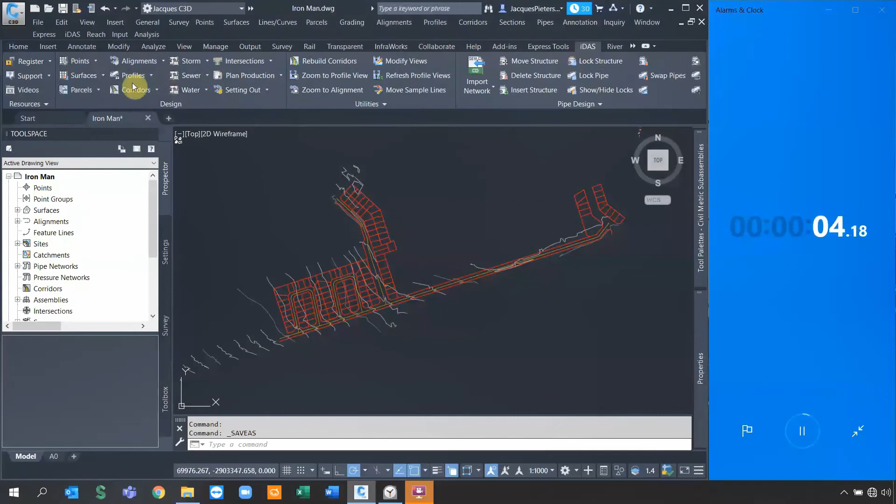Now I'm going to be a bit cocky if I have to say it myself, but I'm going to design 4 roads instead of just 2, and do 1 intersection design. So here we go, if I'm using the iDAS tool command, we've got a corridor wizard. We can simply select the corridor wizard, and that's it.

All I need to do is define a polyline. So I'm going to select this polyline, road 1, road 2, and like I said, I'm going to show off a little bit and do 2 additional ones. So here we go, I specify that.

Then I need to go set up the name convention and some of the styles. You can also add the sample lines if you want to. It does this, as well as the profile designs. I can specify the ETWs, and it will create it automatically.

The default assemblies I can go and set up. The lane width I can specify for all of the roads to 3.7. I set up the profile views and the band settings. And the information inside of that band settings, it will do automatically for me, I just need to specify these three elements, which is the left, right, center, and the surface.

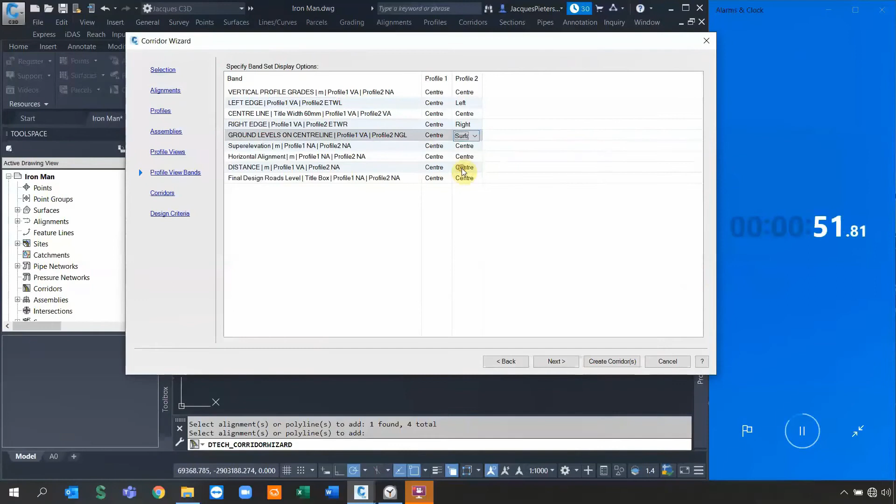That's one of the requirements. And it will even go create the surfaces for the top surface of those roads, so I can specify the style and even the datum surface.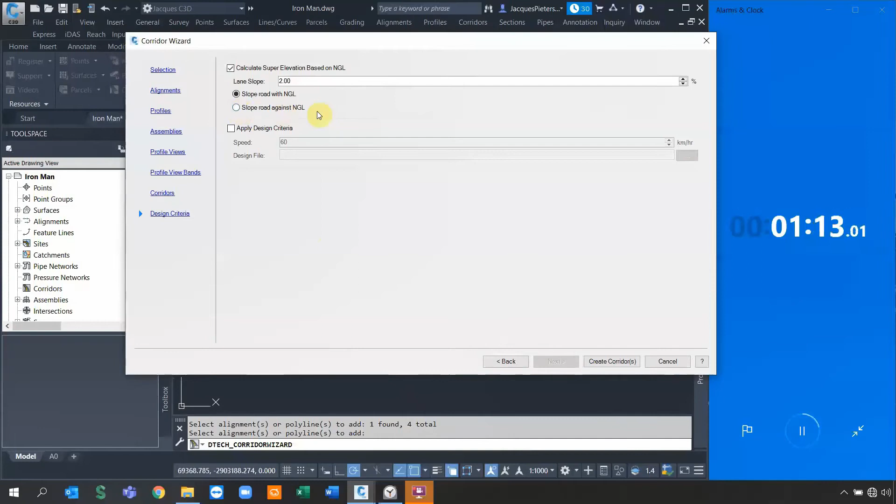Isn't that awesome? So as soon as I say next, I can even do the super elevation design. So I can specify if I want to slope the road with NGL or against NGL, depending on which one you want, and it will do it for you. As well as I can say apply design criteria for all of them.

Remember, I needed to do each and every one of them manually as I go along. Now, this setting does everything. So I simply say create. I specify when I'm going to put the profile views, and Bob's your uncle, it's there.

Done, I know it's insane. So you can still do modifications to this. You can actually go and define the levels as it is.

And now I'm interested in the intersection design. So you're saying, okay Jacques, that was really impressive, but what about the intersection design? So first things first, we need to go specify the bellmouths so I can get the radius.

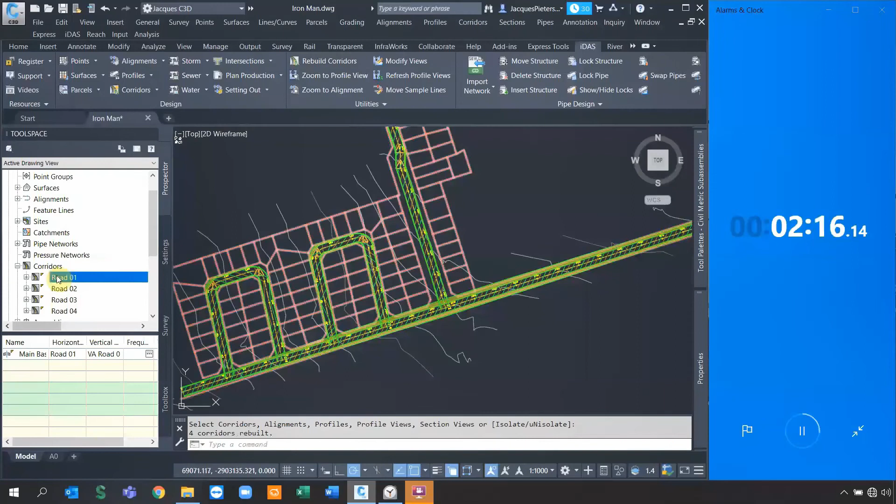Something to note, what I always tell my students and clients: you always need to make sure our corridors are rebuilt. Inside of Civil 3D we have a rebuild automatic function that will assist us in making sure these things are always rebuilt automatically. So I can just say rebuild corridors and select all of them, and they will be rebuilt. That's a very nice function instead of going one by one.

So if I want to do the intersection design, the first thing I need to do is for the bellmouths. I go select for the alignment, select the first alignment, second alignment, and specify the radius of the bellmouths. So I specify 10. As soon as I do that, it adds these 2 polylines because that's required inside the intersection wizard.

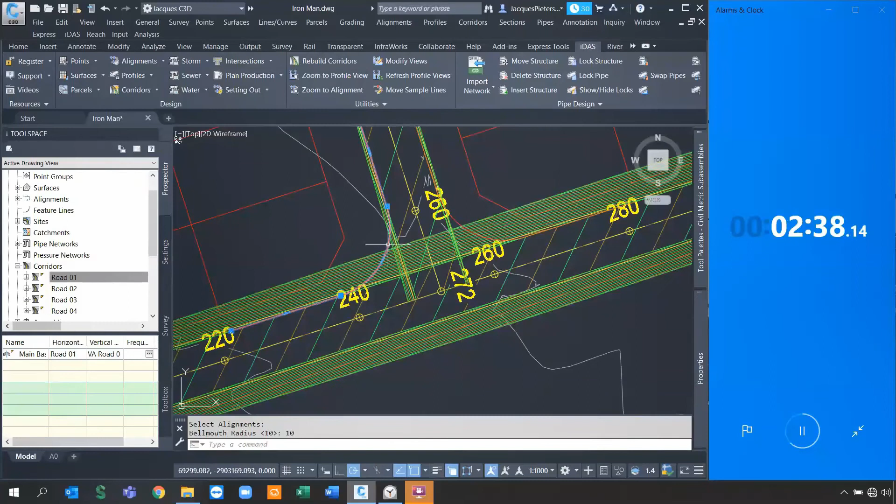If I go to the T intersection wizard, because I have a T intersection here, I specify the intersection point. As I do that, it's going to ask me for a few settings inside, as well as it will change the intersection part for me automatically if I specify that assembly.

And I can go define for Road 02, just make sure those are correct. Now it's going to ask me to select the left bellmouth. So I'm going to select the polyline we just created, and it assigns its assembly, as well as the right-hand side. We do that one, and simply say next.

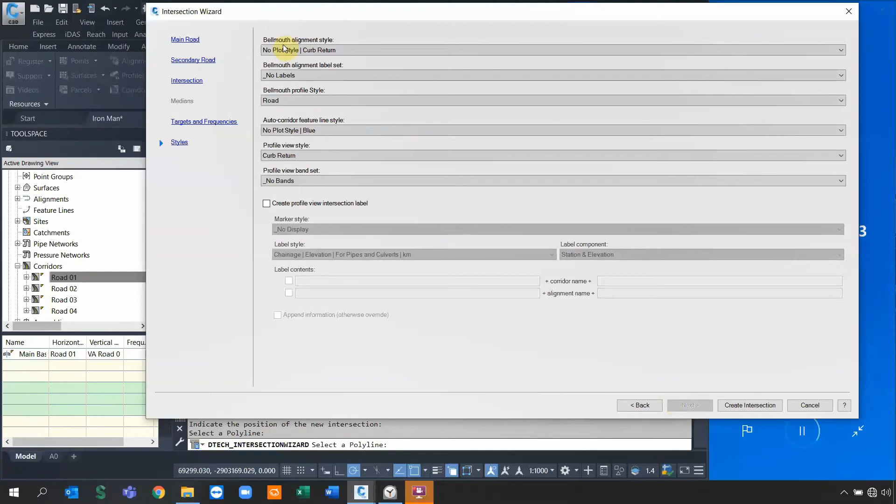I don't have medians, but if I did, I can actually go and do those developments. The frequencies, remember, I need to go into one of them. Now I can do all of them in the same go, and then I can go set up all of the styles, like for example the profile view, and I can say create intersection.

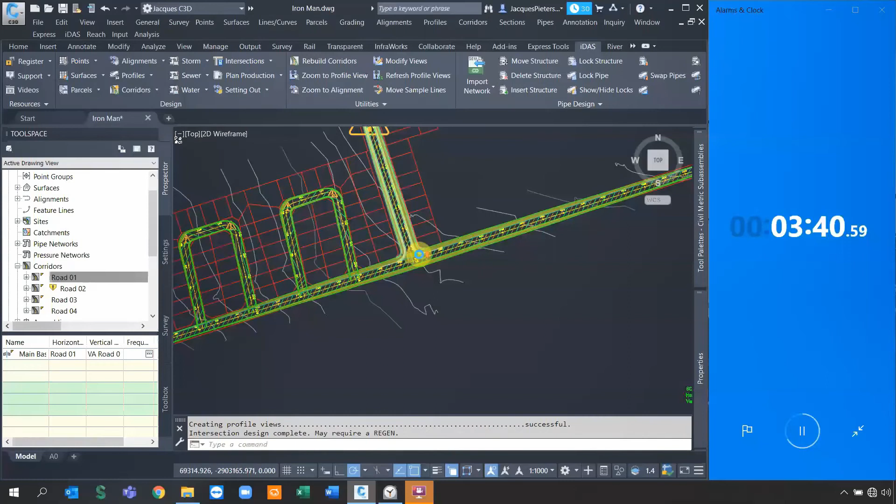As soon as I do that, it's going to ask me to select a location where to place those 2 profiles, which I needed to do manually. As soon as I do that, it will create them. And then all I need to do is rebuild everything. So if I say rebuild corridor, and Bob's your uncle, we're done.

So I'm going to stop the clock. It took me 3.49 minutes just to do the same amount of effort I did with the previous session.

So what has actually been brought in? Let's go a little bit in depth. If I go to the corridor itself, and let's go to object viewer so you can see that I'm not bluffing, it actually did design this entire intersection perfectly.

As you can see, it generated all of those elements. So let's go into 3D dynamic a little bit and check that out. Just like that, it's beautiful, simply beautiful.

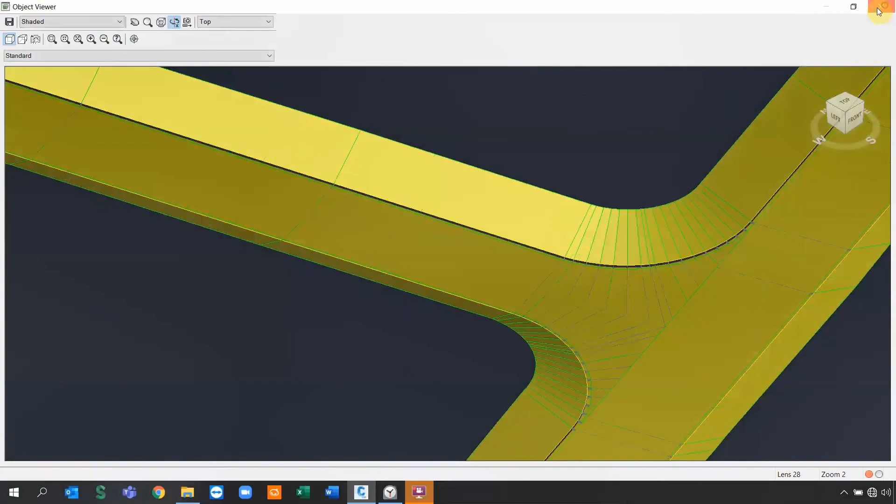So what else has been brought in? Because you guys saw the tedious work I needed to do manually, if I go to the corridor properties, you see it already adds the bellmouth to the left, it adds the frequencies as well as the targets. So it reduces the amount of errors you're doing inside of your company, especially for your civil projects.

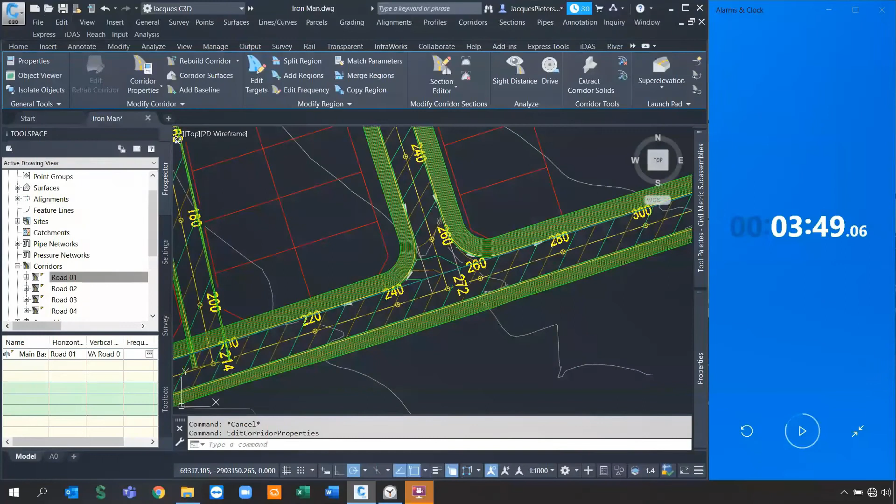As well as it even went as far as creating the profile views and attaching the right data to it. You can still go and modify it. Say, for example, if you change one of the profile designs. So if I do want to do modifications to this, you can.

Say, for example, it does add just a PVI, but if I want to add a curve to it, let's go to edit profile geometry, and I want to add a free vertical curve. Let's add this one and specify a radius. I think 50 is going to be too much, let me just rather say 20.

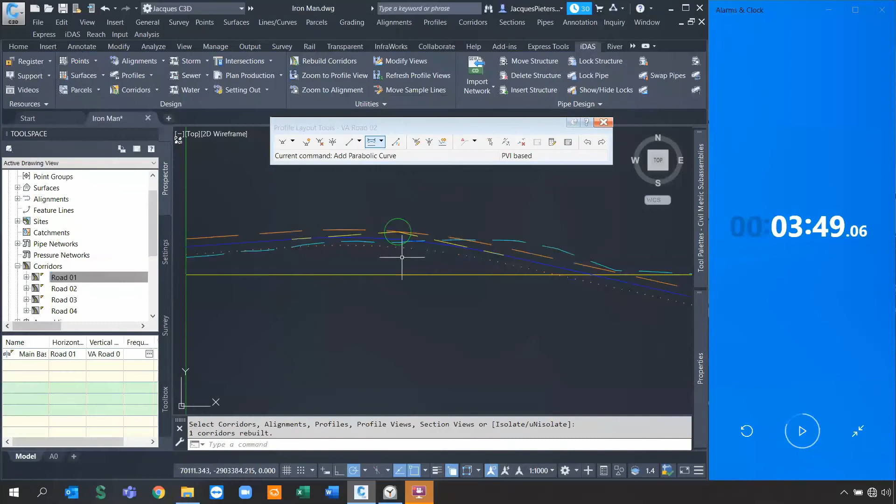And there we go. Now all I need to do is rebuild, and watch what happens as soon as I rebuild. The ETWs also update, so they are dynamic. You do this once and you don't have to worry about the ETWs. It even went into connecting to the existing road.

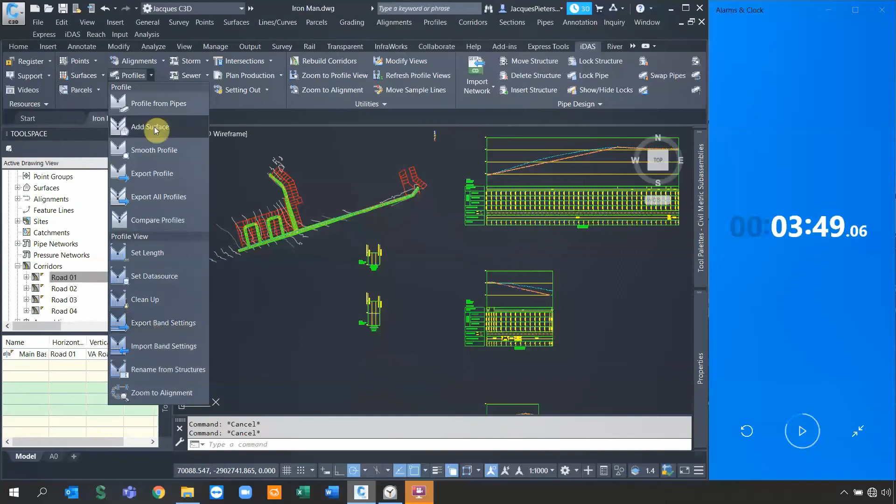There's a nice little tool inside of Civiltech iDAS. If I go to profiles, I can project multiple surfaces to specific profiles. So if I say add a surface, I can select row on top, and select all of the profiles I want to project this to. The old-fashioned way, we'd need to do it one by one manually, but this little tool helps us do it all together. So if I say okay, and yes...

As you can see, if I switch on my line weight, there we go, it's actually added that topographic surface of Road 01.

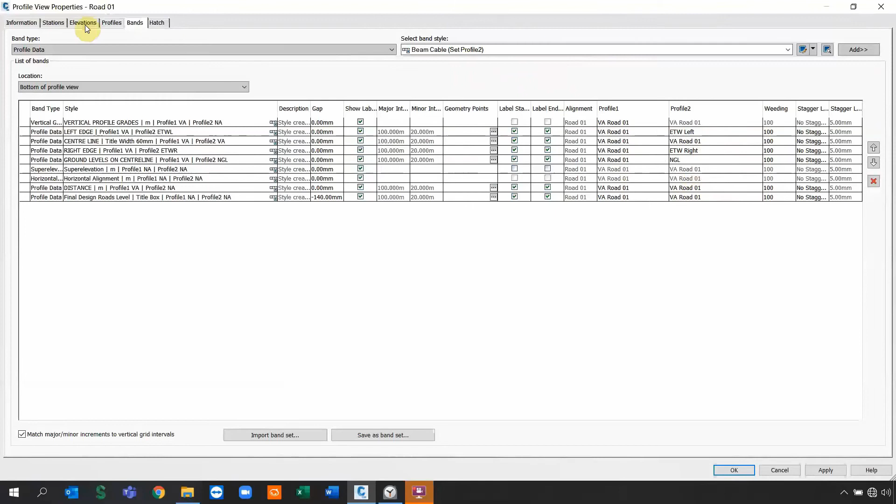The last thing I want to show is for the profile views. If I go to the profile views, he actually puts up the right profiles directly, no more doing this manually. You also have the ability to save these imports and exports using one of the Civiltech iDAS tools commands.

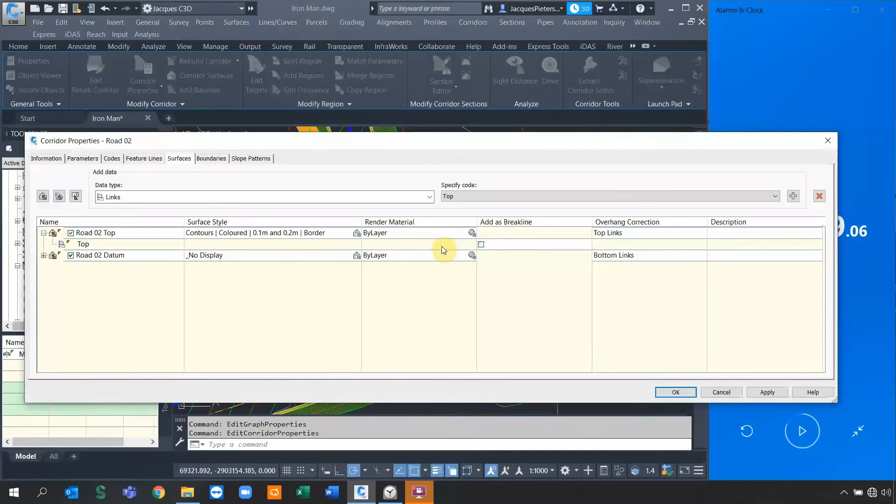Lastly, what I want to show you is the corridor properties. If I go to surfaces, he actually creates all of those surfaces directly, as well as putting up the boundaries for the rest of the parts, which we need to do every time manually. So it saves you a lot of time when it comes to development and time saving.

So ladies and gentlemen, that was very interesting. So Captain America does have its own opinion. So what is the war report and part statistics of what we've just achieved? Let's deep dive into this.

So when using the Captain America way, aka Civil 3D alone, just a quick summary, it took 25.48 minutes to complete 2 roads and half of the intersection. We also have a bit of limitations to this - the edge of the tarway has to be recreated additionally if adjustments were made to the road.

We always need to set this up in our profile bands, which takes a lot of time, especially with very big urban development roads. You could imagine if I have to do 15 roads, it saves a lot of time. Very critical for civil projects, time and productivity for overall completion are affected, because time equals money, and doing it the old-fashioned way takes a bit more strain on clients.

Then with Ironman, aka Civil 3D and Civiltech iDAS, I did 4 designs of roads and an intersection in less than 3.49 minutes to complete. The edge of the tarway is dynamically updated if any adjustments are made to the road design, and the data bands data is already set up correctly from the start. The time and precision has been increased by 86%.